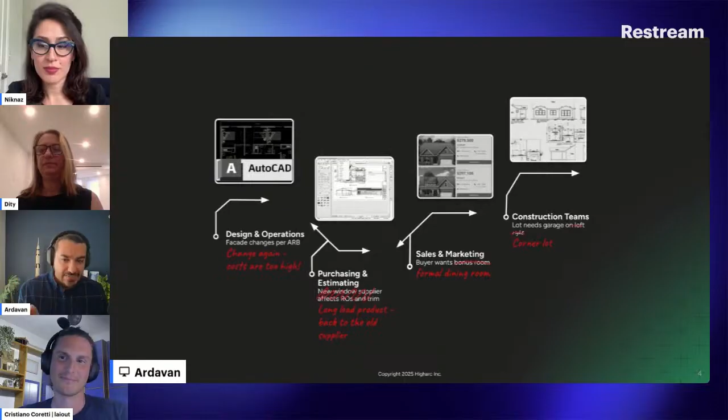So Higharc is basically working to solve a problem in home building. You know that in the design and building process, there is this workflow in which you need to produce documents, go through procurement, sales and marketing should be aligned with you, and then you have the construction team. But this is not a one-way street. It's actually a back and forth process in which different people have different ideas, different words to say, and it means that you need to go back and forth and get a lot of comments to incorporate their ideas, their points of view, and their edits.

But the problem is that we are working with static plans. These are dumb documents that are usually in the form of PDF. They're sometimes not searchable. They're not dynamic. If you change something in that workflow, you need to go back all the way to the beginning, edit the file, then manually propagate those changes all the way across the process. And this actually holds us back, costs us time, costs us money. And on top of that, the product data, financial project data, and customer data are not combined together, not connected to each other. So there is a static document, and then there is fragmented data across the platform.

So Higharc is trying its best to solve this problem. In order to do so, we have this idea of transforming drawings into live data that can be propagated from the drawing table all the way to the construction document. So if you need to adjust something based on feedback from the construction team, the design team, or the financial people, you can do that, and it's going to automatically propagate all the way across. So your building team is going to be aware of that. It's going to be incorporated in the construction drawings. And your sales team is going to be aware of that. So it is going to solve that problem of fragmented and old format data by converting it into live data.

Now, how we do it: we have a suite of different products. The flagship that I like the most is the studio. You see it on the left side. It is the place where you can do the design and also implementation, and you can introduce different options and configurations into a house. So basically, it gives you a lot of flexibility, and then it brings the data to the cloud, in our single source of truth that communicates with the rest of the products that we have here. For example, we have an estimation tool that gives you the list of materials, the cost, and everything. So as soon as you edit something in studio, you will immediately get back the price reflection. The construction data is also something that we produce at the end of this pipeline, and it actively gets updated.

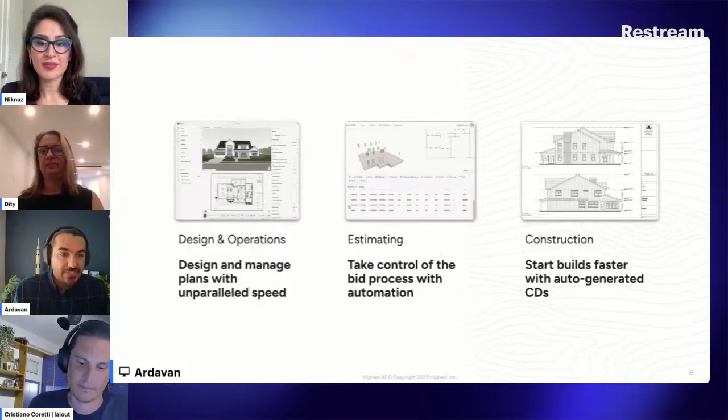And in order to make the whole pipeline complete and have the user and buyer experience properly here, we have a sales and marketing interface, which we call Showroom. And then, slightly separated from this, in a very seamless process, we have these interior walkthroughs and visualization service.

So this is basically what we do. We make sure that we have a single source of truth that everybody who has a word in the process can actually incorporate into the development, and everybody is on board. I joined the company around 2 years ago, and for a period of time we were thinking about what would be the proper application of machine learning in our pipeline to add value to our users, rather than having something that's nice to have.

So we've done a lot of brainstorming. We talked to our clients, we talked to the team that we have in-house, and we came up with this idea: what if we can translate these dumb drawings? By dumb, it's not disrespect. I just want to mention that it is not active. It's just like a piece of paper or raster drawings, into live data that we have in our Studio.

And our Studio uses a lot of explicit AI, the old school rule-based system, to convert a room into the whole BIM system. But we wanted to see if it's possible to use machine learning to make it a little bit easier to go through this process. So going from static drawings into a live 3D BIM model.

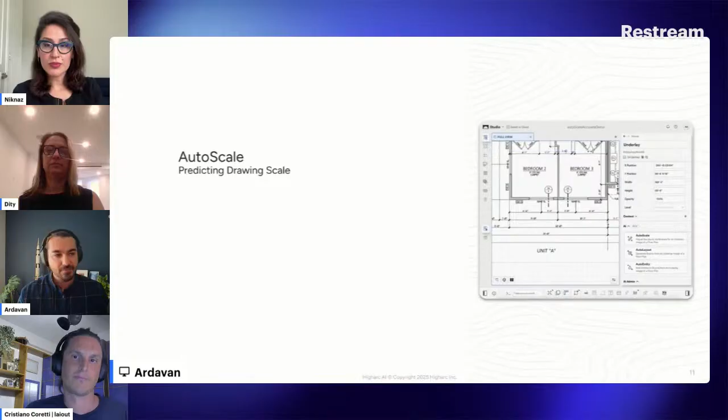it can infer the scale from objects, and it can even read the text inside the document and figure out what the proper scale is. But when you have a dimension line, it is 99.9% accurate. And I'm so proud of that one.

Then we have AutoLayout. So basically the whole idea here is, if you have a drawing of a plan, no matter if it's a construction drawing, brochure data, or even a nicely drawn hand drawing, is it possible to convert it into the representation that we have in our flagship software Studio? And we worked on this one for a while. It is a very time-consuming process because we needed to take care of the data pipeline. We had to label the data, train models, and integrate it into our workflow. And right now, it's capable of doing a task like this one. I'll show you a demo a moment later.

But it not only recognizes the boundaries of the rooms with walls, but also figures out what type of room it is. Because, for example, if you want to do some estimation based on this tool, you need to figure out if this room that you are measuring is a kitchen or a bedroom. There are different costs for each one. So this does the job for us.

And one part that I'm really, really happy with is that it doesn't need to see any wall between the rooms. For example, if you have a living room and a dining room in an open plan, it still can recognize and distinguish between them and put a boundary between them.

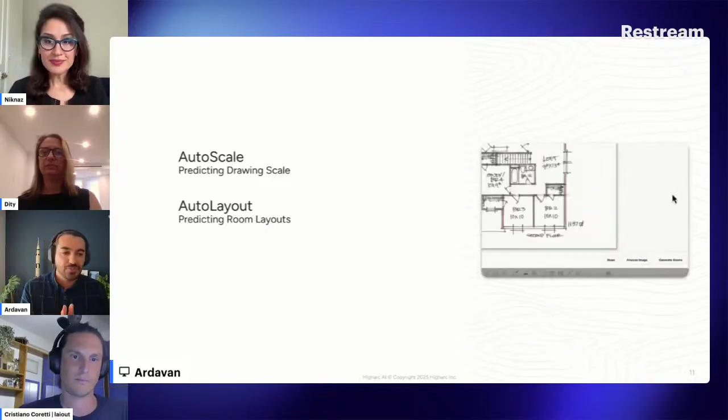And the last feature that we have here is called AutoEntity. It basically looks at the document and sees toilets, sinks, doors, windows, and it's going to put them in the right place for us. Together, all these 3 are called AutoTranslate, and it reduces the time that you need to do the initial implementation from maybe hours into seconds.

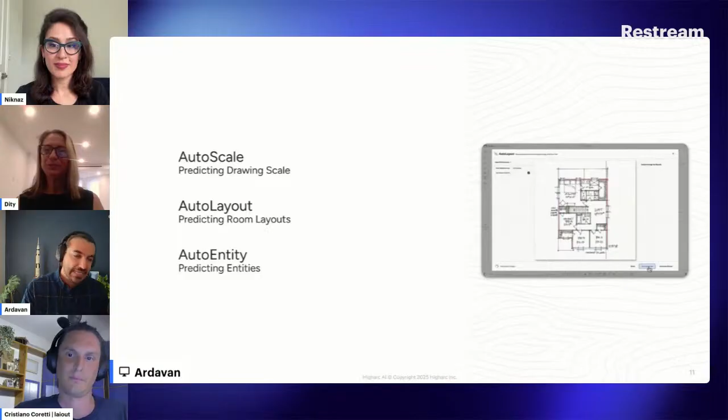And like any other product that's in the development phase, it is not the perfect solution. Right now, it has some issues. I'm just going to show you this demo here, and just to clarify, this one is not cut. It's just one single video that you see here. So first, I just scaled this model. And then I actually measured later on.

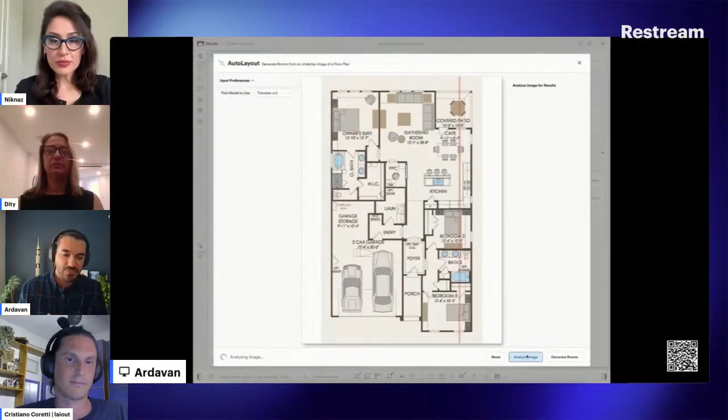I realized that, for example, the bedroom at the bottom, which is 13 feet and 4 inches, is actually right now in this drawing scaled into 13 feet and 3 inches. So we have a small error. And you can see that it actually recognizes all those rooms. And there are some small errors, for example, the boundary of this garage is not correct. But I can edit that one in a fraction of a second. And also it's using one of our earliest models, so right now we are even more accurate compared with this one.

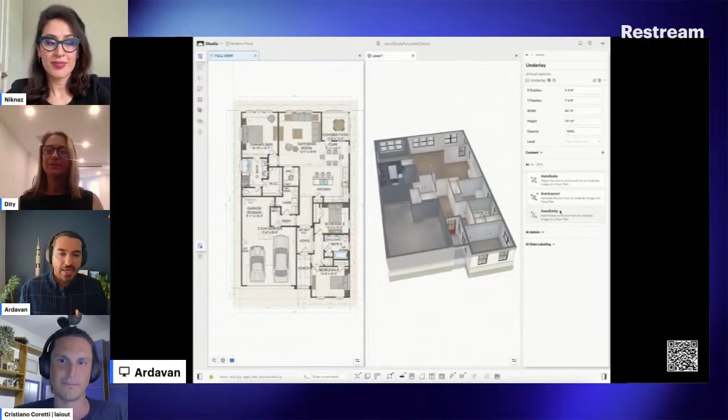But because we have this studio system behind this, as soon as I give it the boundary of the rooms plus the label of the room, it automatically populates a lot of information about it. Again, pay attention to the fact that, for example, the cafe and gathering rooms are basically one big space, but it recognizes that they are different rooms.

And then I use the AutoEntity to place, for example, toilets, cabinetry, and doors and windows. Again, it recognizes most of this stuff, but there are some errors. For example, the garage door was not there, but it was recognized. It's just a matter of fine-tuning our process.

So to be clear, this is a feature that we think has a lot of potential. First, in quick implementation and allowing people who are not very accustomed to design software to actually be part of this conversation. So if you want to have some design sketch at the earliest stages and then just see what would be the price for that, or you want to see what the assessment or estimation is, you can do it.

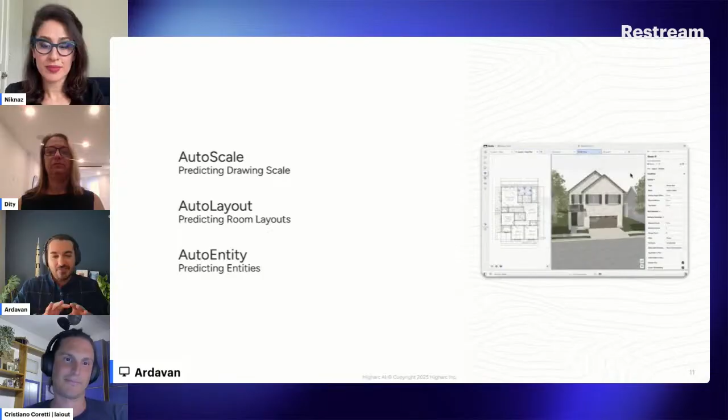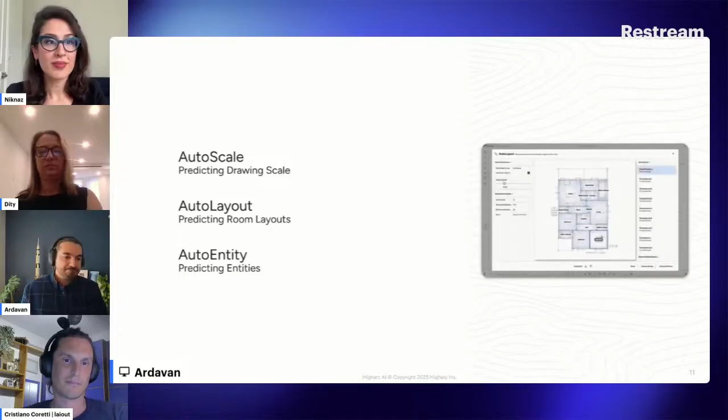If you want to just quickly implement something in order to share it with someone else, this is going to give you this option. We had even lower fidelity drawings, like hand drawings, that it was working with. The QR code that I had on that slide gives you the link for another video that Michael Bergin, my manager, provided a couple of weeks ago. And you can see that even a child's drawing is properly working with this workflow. So this is what we are doing.

But if you want to think about what type of role generative AI, or to be more specific, generative machine learning at the moment, is going to play in AEC, I would say there are some new horizons that we can look at. I cannot confirm or deny whether we are working on these topics or not, but these are some of the topics that I see floating around, and I think there is value in each of them.

Just to be clear, whatever I showed you in the previous slides is mostly discriminative AI. That means you have an object, you have one input, and you figure out what is the label associated with that one. When we are talking about generative AI, it means that you are going to generate new material, for example, text and everything. So I think the first level, maybe the low-hanging fruit for Gen AI in AEC tech, is to use it for low-fidelity vibe-checking visualizations.

The reason that I'm talking about this one is, if you're selling a house based on the visualization that you have, and you show that there is this doorknob here on the door, and then sell people something else, it's going to be a problem. So if you want to just make visualizations with low fidelity, just to give the people who are seeing it a kind of vibe about what's going on, these models are pretty great.

Right now, there are some tools you can run on different platforms through APIs, doing in-painting, style transfer. That's actually really great. I think there is a lot of potential there.